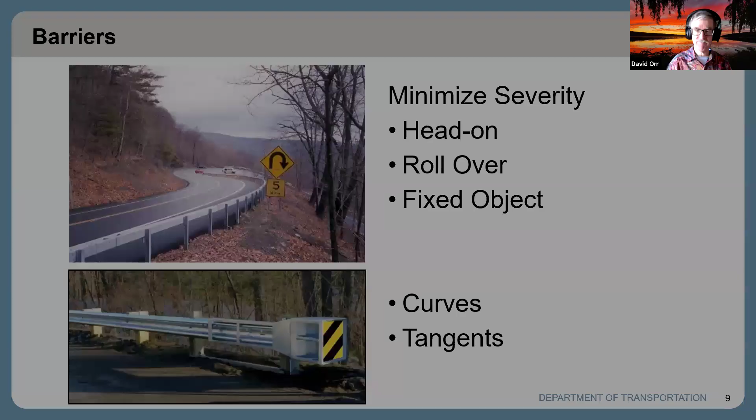So let's get you to raise your hand and ask. Do you think you need rail here? We're going to make you work a little bit. So, do you need rail? I'm hoping most of you raise your hand.

This would be a spot over in the Gunks, not too far from New Paltz. It would be really hard to make this safe as we'd like it to be without some kind of rail system. You can't really do any of the other steps that we'll talk about here in a little bit. So yeah, this is a spot where you definitely need rail.

Now I'm going to lower everybody's hands, so don't keep clicking. Let's just ask that same question. Do you need rail? What do you think? How many of you think you need rail here? Okay, not as many of you think you need rail here.

We'll talk about what you could do if you didn't have rail here. The big thing I want you to take home more than anything else: if you decide to put up rail, please put it up so that it will do the job. This particular rail has some issues which we'll talk about, so make sure you do the rail right.

Now, what we're going to talk about: we're going to start with roadside hazards. What are we trying to protect? Again, if you can't access the polls, that's fine, just put your answers in the Q&A. I can add it in, it's not the end of the world.

We're going to talk about roadside hazards—what's out there on the roadside we have to protect against by doing certain things, including rail. We're then going to talk about the treatment options themselves, and then what is the correct rail. Selecting the rail is pretty important, including intersections and transitions and things like that. And then we're going to end with a series of short case studies, putting it all together to see how you're doing, and also maybe pick up a couple of final items as we go.

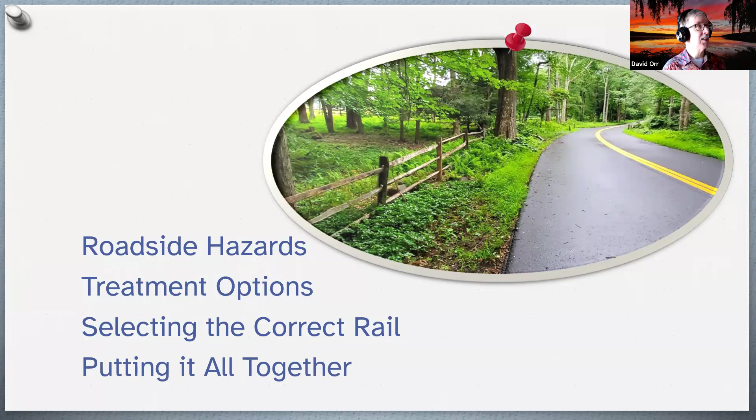Okay, so let's start with roadside hazards. So what kind of roadside hazards are we dealing with? Well, let's just ask you: type into the poll some typical roadside hazards, things you're worried about.

Trees—oh very good, trees, I like that one. Again, you can put it into the Q&A if you can't access it, and trees is up there. Rivers, ditches, curbs, utility poles, abutments, fixed objects, houses, rocks, buildings—I like that. Banks—it could be a bank as a building, or it could be a bank as the side of a road, that's a lovely thing about English. And over in the Q&A I've got piers, rocks, bollards. Again, there's lots of things we can think about putting out there, and there's a few others that I've got on my list.

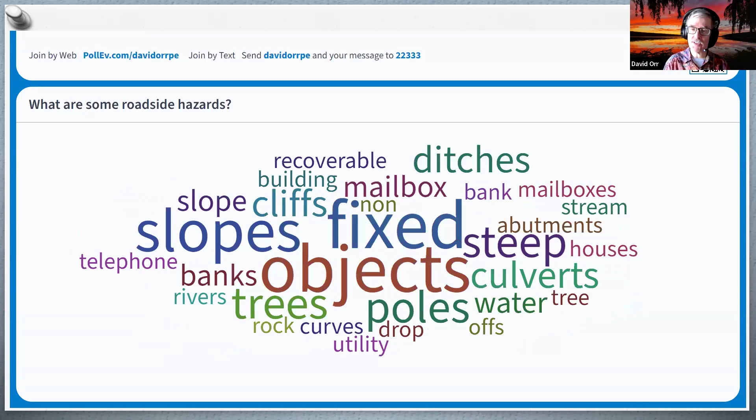Now, one thing I didn't mention—and again, this is not a rail issue, but it is something we have to think about for roadsides—rail doesn't do us any good if we've got a poor edge drop off. So just keep that in mind as we're thinking about our treatment options. Long before we worry about the rail, we need to make sure someone can actually get to the rail. So look at your edge drop offs, include that. You want to think about your cuts and your walls.

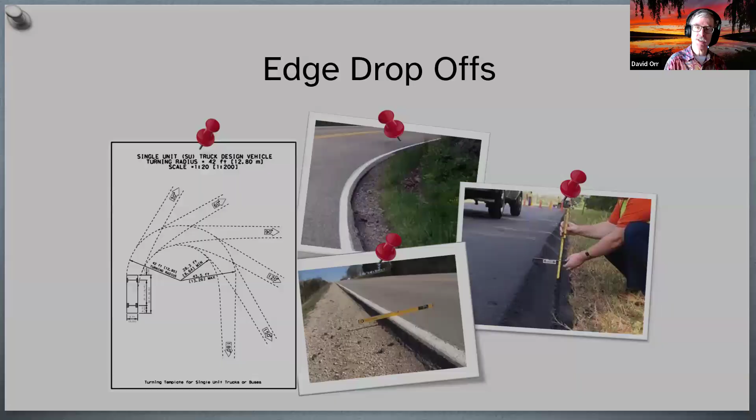A wall that's nice and smooth on the inside, or a cut section, might not be as dangerous as a fill section. Is that wall enough, or do we need to do something more? That's a balancing act, and there's no perfect answer here. We're not going to give you all the details you need, but in an hour we can at least think about the kinds of concerns that might call for rail or might not.

Now, obviously, slopes - that was on your Wordle that we created. Slopes is a major issue, especially a big fill section. Obviously if someone goes off this slope, that could be an issue. But the challenge is, if it's a really low volume road, is it worth putting up the rail? We'll talk about that a little bit. But slopes is an issue - in fact, it's probably the place we put most rail up.

Someone put in rivers and streams. Obviously, especially if someone can get behind the rail system, if they drove into a river or a stream - especially if it's deep - that could be a safety issue, or a pond. So these are things to think about.

Now, nobody put the next item on my list in the Wordle, and yet it's out there, but it would be awfully hard to put rail up to protect it - and that is mailboxes. We need to make sure mailboxes don't, in of themselves, create a safety hazard. So think about that. And again, we can do things before we put rail up to make it a little bit safer.

And the term appurtenance - a new word for you if you don't have it in your vocabulary. Appurtenances include your signs, your poles, your guide rail. These are all things we have to deal with. If they get struck, they can create a safety issue if they're not installed properly. So by themselves, they can become a fixed object that we want to be careful about.

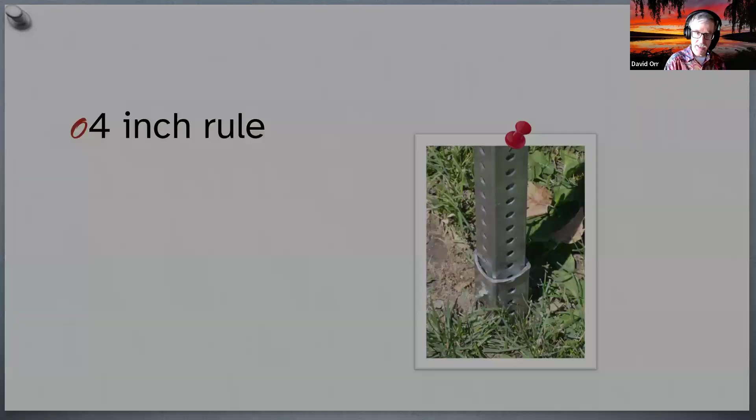Now, I said I'd talk about this a little bit. Poles - we can't do much about all utility poles, but if we have a pole in a particularly difficult location, and you can't move the pole and they really have a problem, they do make breakaway poles. We don't want a breakaway traffic light pole, because obviously if it falls, that can create other safety issues. But for utilities, they do make such poles.

If you're interested, there's a lot of information in the state's highway design manual section on Guiderail, which is chapter 10, and that's listed in the handout if you need a link to that. But the thing I want you to think about is the fact that guiderail in of itself - and some people call it guardrail, but Guiderail is what we use here in New York - guiderail in of itself is a fixed object. And if it's not done properly, it can actually make crashes worse than if there had been no rail there in the first place.

So I want to make sure we understand that before we leave after the hour together.

When it comes to fixed object crashes, the first thing listed were trees. Trees get listed first because 48% of all the fatalities that occur when you hit a fixed object happen because somebody hit a tree or a big shrub. So yes, trees are an issue. We can't get rid of all the trees, but we can think about where trees are and how we manage them. By the way, trees in urban areas can be just as deadly. Low speed still has a lot of tree fatalities. So trees are the big issue.

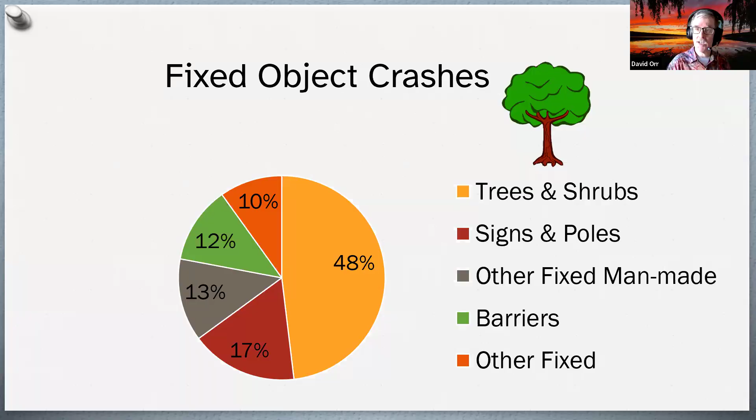In terms of the clear zone and basic recovery width, a clear zone is essentially the distance from the edge of the traveled way until the first fixed object. In the state's Chapter 10 on Guiderail in the Highway Design Manual, that's also listed as a basic recovery width. If you've got a wide roadway, like on the interstate or a major road, you want some width where if a vehicle pulls off, it would be safe for them to drive and not hit something. We know that clear zone requirement is going to be very difficult for a lot of people, so just something to keep in mind.

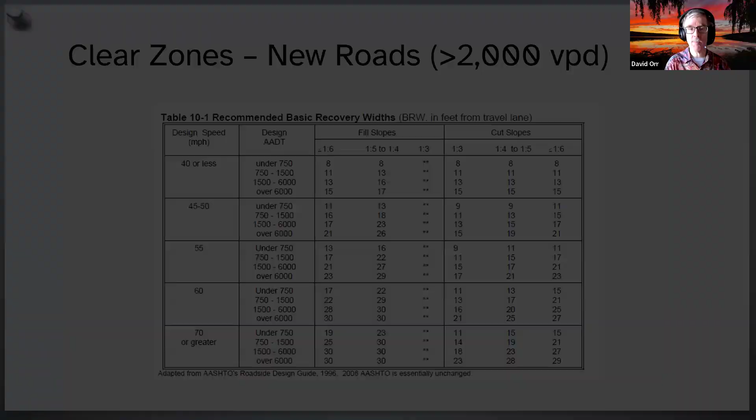The requirements in the state's Highway Design Manual range from 8 feet on a fairly flat slope all the way up to 30 feet on a high-speed roadway. I know you're all thinking the same thing right now—you're going, hey, that's too small. That's okay. If you really want to look at these distances, go look at Table 10-1 in the Highway Design Manual, which is listed in the handout.

I see a question about breakaway testing requirements. I'll talk about that here in just a minute, and we'll leave that question active so I don't forget it when we get to that particular section. Okay, thanks, Jody and Amanda.

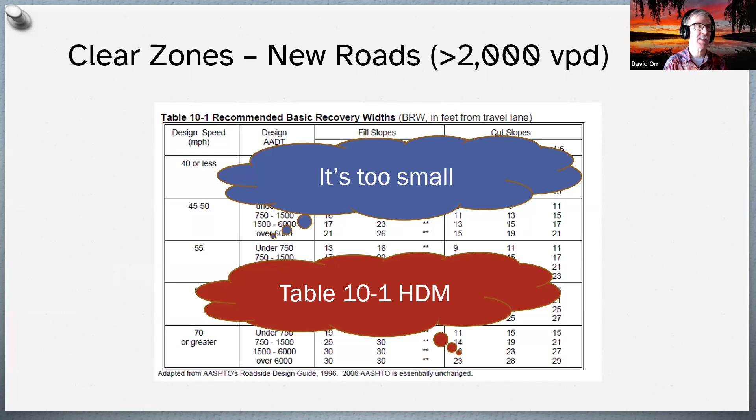So what is the clear zone on existing low volume roads? There's a standard from AASHTO called the Low Volume or Little Green Book, designed for low volume roads. If you read it carefully, essentially if you've got an existing road that's low volume—and low volume we could argue about, but it's about 2,000 vehicles at the upper limit, though 400 might be a more realistic number—if it's an existing road, you just maintain the existing clear zone width.

There's an asterisk there, though, meaning you still need to look for problematic issues. Maybe it's something that's never had a crash but could still lead to a severe issue if it did. A row of trees may or may not be a problem in itself, but we'll talk about that in a bit. The key is you need to look at your problem locations and improve anything during construction. So if you had a tree or two that was a problem, especially on the outside of a curve, that's where you'd spend your money and effort.

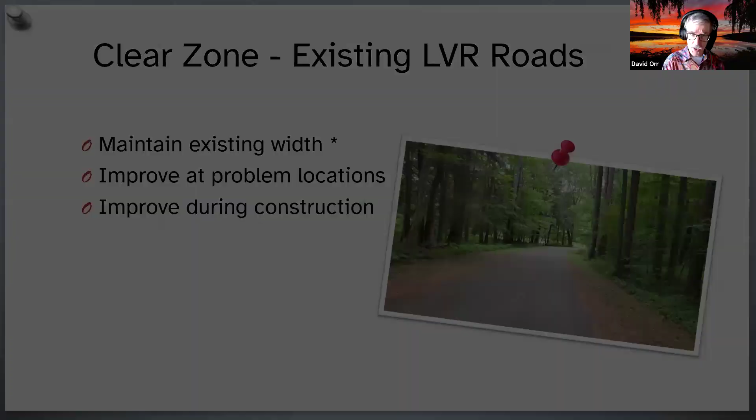Now, are there any issues here? If you've seen this picture before, I've shown it in a few other of our slide decks. It looks like it's not too bad to the left, but think about if you drove to the left and didn't see these stumps.

By far, one of the biggest things is that once you decide you're going to remove something, remove it. Make it flush. Again, that 4-inch rule is pretty important. In this case, those stumps may actually be more dangerous than a tree would be, because they're really hard to see. So someone might actually think they're going to a safe spot when they're not, okay?

So before we put up rail, we really need to think about the treatment options that we've got. What we really don't want to be seeing is fixed objects that look nice but could be deadly, okay? So the first thing we want to do is think about the order. Long before we put up rail, we're going to be doing other things. We're going to remove the problem. We're going to make it traversable, as safe as possible. We're going to relocate it completely out of the way and get it outside the clear zone we would like.

Reduce the impact severity, and some people use the term crash worthy. Some people you'll see use the term breakaway. There's some overlap in all of these things, but the idea is you're still going to hit something, but hopefully when you hit it, it's not so severe. And we can argue, by the way, about what is traversable, what is crash-worthy, what is breakaway. I just want you to keep in mind that long before we put up rail, we need to make sure things are as safe as possible. Rail, shielding, is actually one of the last things we look at.

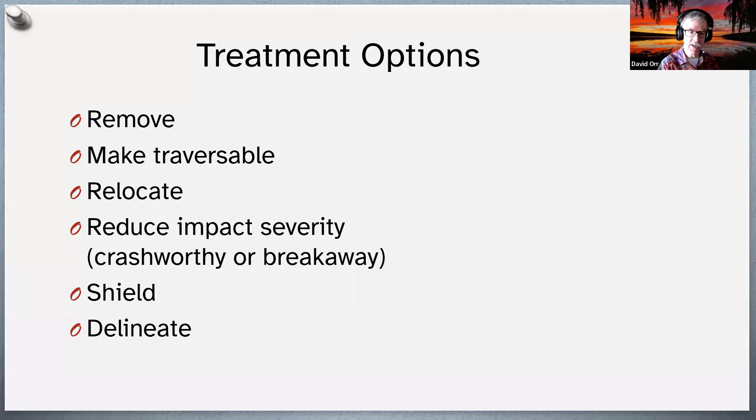Now, the standards all say for higher volume roads, especially, the last thing we want to do is delineate. I will tell you right now, personally, as a short term, you should always think about delineating things. And there's some evidence for those low volume roads, in this case at the 400 vehicles per day level, that delineation may actually be less risky than putting up rail, just because of the challenge of putting rail up, okay? So keep that in mind as we do things.

Now, what I mean by removing, well, that means get rid of the hazard completely. Now, some people will say that I've just made this traversable by filling in this ditch and putting in a series of catch basins so you can drive over it. You get a nice wide clear zone. True, but we've removed the hazard from the standpoint of the driver. If you can remove it, that's obviously our first choice, and we actually can do that in some cases. And when we end our session today, we'll talk about a couple of those.

You can make things traversable. Now, in a perfect world, traversable means going over the top, and there's still something there. Maybe that catch basin, the last one, was actually traversable. There are things out there to make ends of culvert pipes, especially those parallel to the roadway, a lot less dangerous. Doesn't mean there's not going to be property damage, but if you drive down the road, you could drive over these rebar grates or these special ends that go on the end of culvert pipes without doing anything other than property damage if they're installed properly.

The ones I like, by the way, you can grab on them in a storm event and pull them out of the way, but we can talk about that. But again, remember, whatever you put up might create damage, and that 4-inch rule still comes into play.

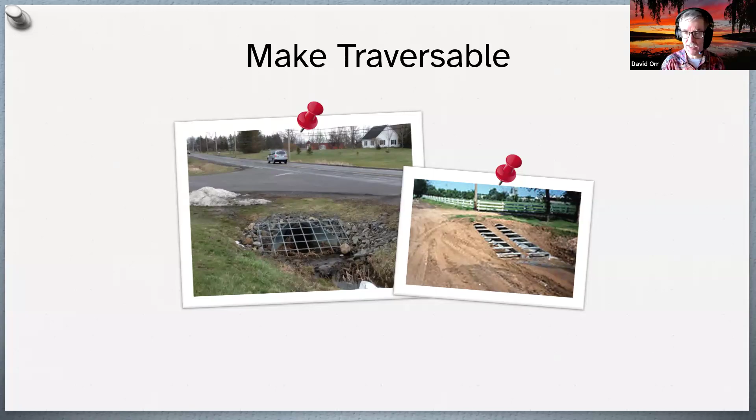In this particular case, that series of utility poles is right in the bottom of the ditch. Almost one of the worst places to be. Obviously, I think all of us would agree, we really should be having that pole... let me pick a color I think will work. Let's see, I think the white will work. We really should be having these utility poles up here, up on the top of the bank, okay? So that if a vehicle does go in the ditch, which, yeah, it's probably a little deep, but at least if they go in that ditch, they don't go down the ditch and wind up driving right into a utility pole.

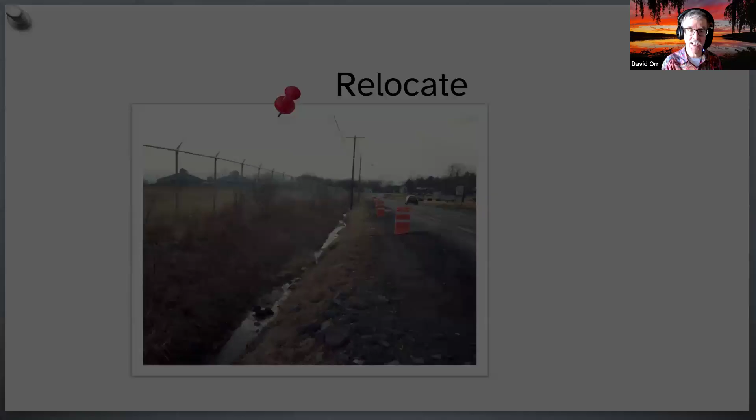Now, even if you've got a flat ditch, think about this. How many of you, raise your hand if you think that utility pole needs to be moved? Raise your hand. Please raise your hand. Everybody should raise your hand. That utility pole is in one of the worst possible locations. It really needs to be back up on the top of the back slope.

Okay. I actually ran the math on this particular one. If I was to move that utility pole right here, just off the edge of the pavement, it would actually have about the same chances of getting hit as where it is now. Because yes, it's closer, so it's more likely to be struck by an errant vehicle, but I don't have to worry so much about someone who goes all the way in the ditch and stays in the ditch. That's actually a fairly common crash type. They go parallel the road to the bottom of the ditch. So, obviously what we really want to do is put that thing out here.

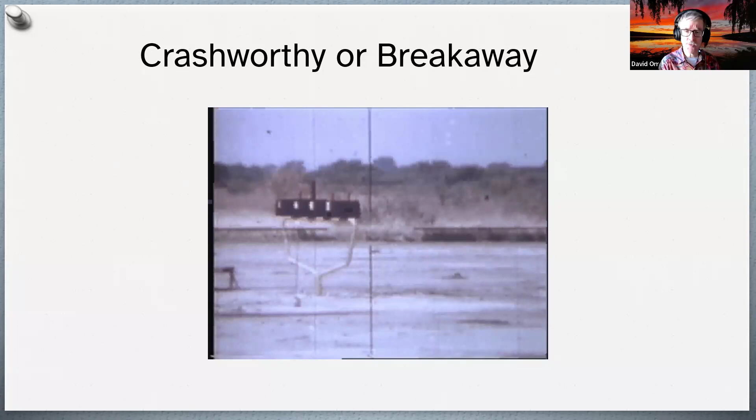And I hope, by the way, that that pole, that post, is breakaway, not too thick. Gets bigger than 4x4, you need to be thinking about drilling holes in it, things like that. So what do I mean by crash-worthy or breakaway? Well, crash-worthy or breakaway, reduce impact severity, different terms for it. Here's an example of a gang mailbox. Watch what happens. Rather than it going into the vehicle like we saw earlier, it's designed to actually snag on the hood and pull out of the way. Okay? Again, it's going to do some property damage. We know that. But it's not going to go into the vehicle. So that's what we mean by crash-worthy or breakaway.

That includes mailboxes. And yes, I see the states putting them up. I think it's a good idea if you've got a high-speed roadway. And what's high speed? Well, anything above 30 miles an hour is probably a place where you need to be thinking about, worrying about people hitting something in the mailboxes. And it's not the speed limit I worry about, it's what people are actually driving. So think about breakaway. That's your breakaway hardware for your signs. That's your breakaway possibly for utility poles. Anything that has to be in the right of way or has to be in the clear zone because of the need we have for traffic, think about making it crash-worthy or breakaway when somebody hits it.

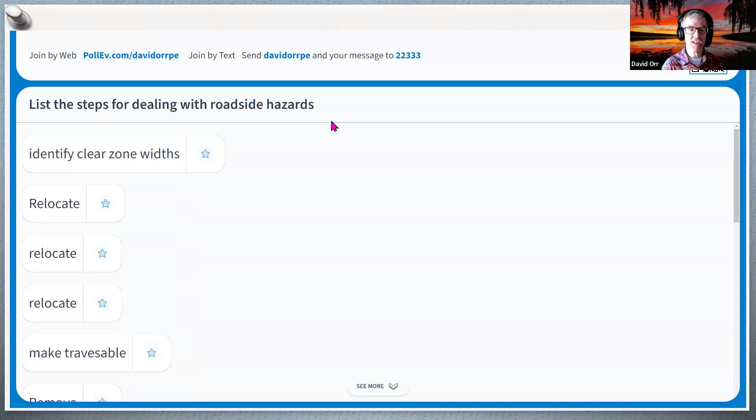Okay. So essentially, think of it this way. You want to remove the problem, make it traversable, relocate the problem, make it crash-worthy, and if you can't do any of that, then we start talking about shielding. And you always look at delineation. And on a low volume road, that may actually be the right thing to end with if you can't do anything else. Now, let's talk about choosing the correct guide rail.

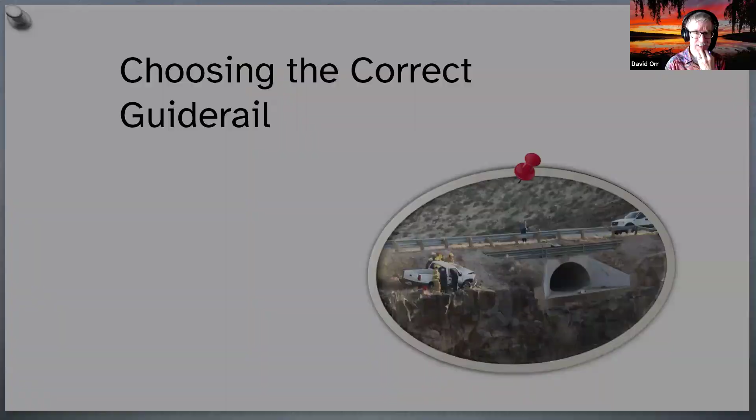Now, what is guide rail? Well, guide rail has different types that are out there. We care a lot about the deflection distance behind it, the point of need, where do you actually have to start the actual rail segment? That makes a big difference. I'll touch briefly on something called run out length. On a local road, you're not going to see a lot of that, but you might see it on the interstate or protecting a river or stream, but something to think about. And then we'll definitely want to talk about end sections because if you don't have a good end section, the rail doesn't do the job.

Now, in the Q&A, somebody asked for information about breakaway systems, okay? And what's going on with breakaway systems today. We used to do breakaway and hardware testing that includes signs and rail with something called NCHRP, the National Cooperative Highway Research Program, Report 350. But that got replaced almost a decade ago, now, in 2016, with the Manual for Assessing Safety Hardware. Okay, there is a newer version, but I just want you to realize it's been around for a while. All hardware gets tested using this system.

It accounts for the vehicle types and sizes, and then the Federal Highway Administration actually puts out letters to say, hey, these have met the particular standards, and then states will adopt those standards. So inside of the HDM, it lists the hardware that the state uses here in New York State. New York State has actually spent some money to test box beam, which we'll talk about, and cable rail using the new MASH system so that the current standards here in New York meet those requirements, okay? But again, those need to be approved materials. And then in terms of guidance, you'll look for that material information in MASH, okay?

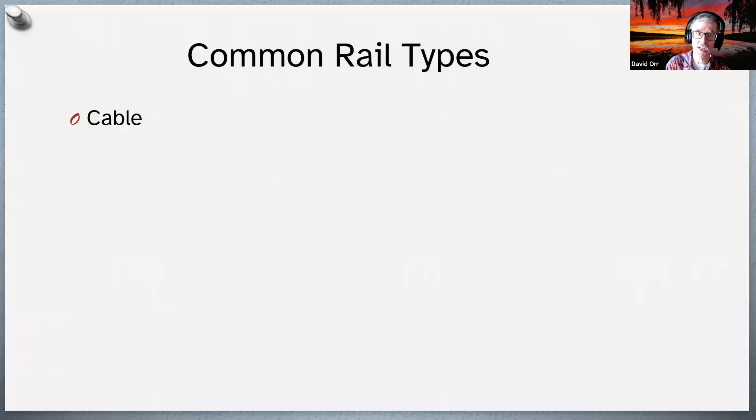So what common types do we have to deal with? Well, obviously, we've got cable rail, we've got weak post W-beam, box beam, heavy post, blocked out W-beam, concrete half sections are the most common. There's tri-beam, there's lots of connectors, there's special things you can do with all of these. But again, we're just going to touch on these and talk about how we choose one over the other.

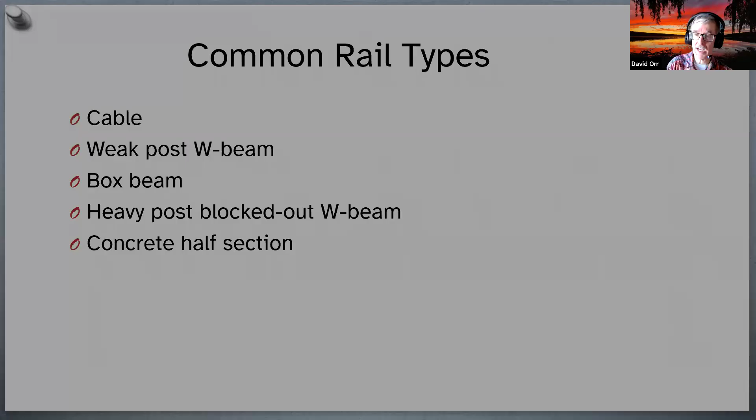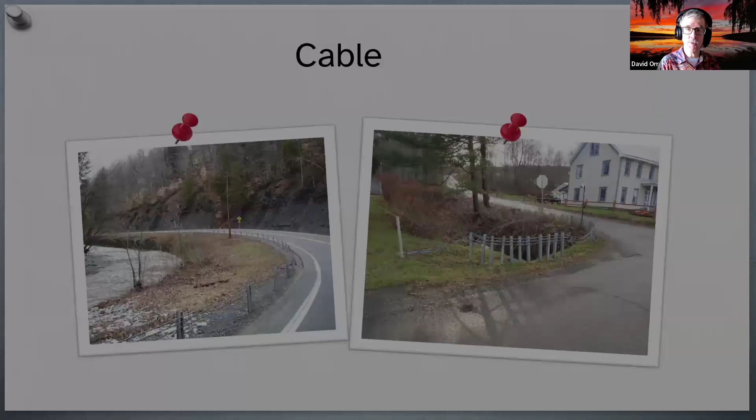So a lot of agencies, especially if they don't have a large staff, might prefer to look at using a weak post W beam. It's essentially a fairly small post with just a W rail in front of it. It's very popular, can be made with the Corten brown, all that fun stuff if you want. But again, it's got to have the transition, it's got to be able to build up that length, but weak post is very common.

Box beam, the state likes box beam here in New York. DOT had some of that tested using MASH. You'll see box beam all over, and it's used on a lot of bridge rail, especially multi-box beam for the bridge, and then it goes down to a single box as the approach system comes into place.

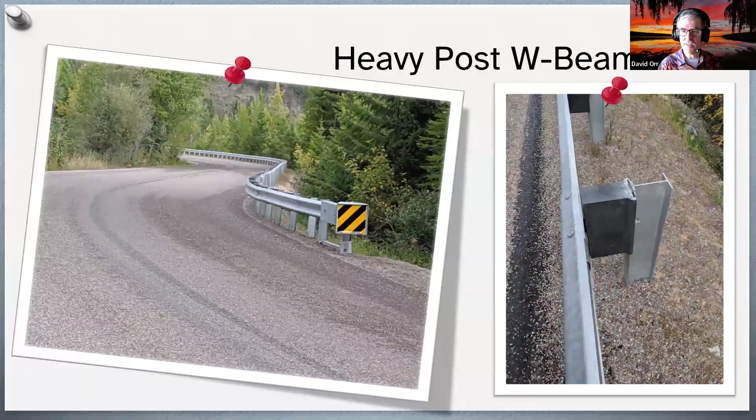Concrete half sections, well, you don't want zero deflection. Concrete half section can do the job, but how do you transition to zero from no deflection? Transitions in sections on concrete can be a challenge. So what type of rail should you use?

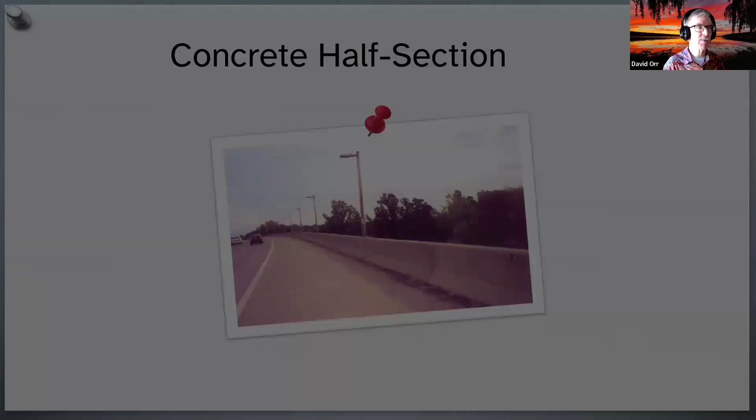Here's the thing: I'm a big believer in using the lightest possible rail that will do the job. The lightest rail that will do the job. Because there's no point in putting up something heavier—it costs more, and it can actually start to create some deflection problems. So something to be thinking about.

Now, somebody asked: does the NCHRP safer barrier used on highways anywhere in the country—is it too costly? I'm not aware of any location that's got it, but that doesn't mean it's not there. It's a big country. We're talking about general types and local guiderail policies that have been developed. I don't know of any local ones that have been developed. That's not a bad idea to have a policy dealing with residents, because residents want rail. And railing, again, is a fixed object in of itself, but people like to jump to it immediately. So I don't know of any particular ones, but if you've got one, send it our way—we'd love to post it on our website.

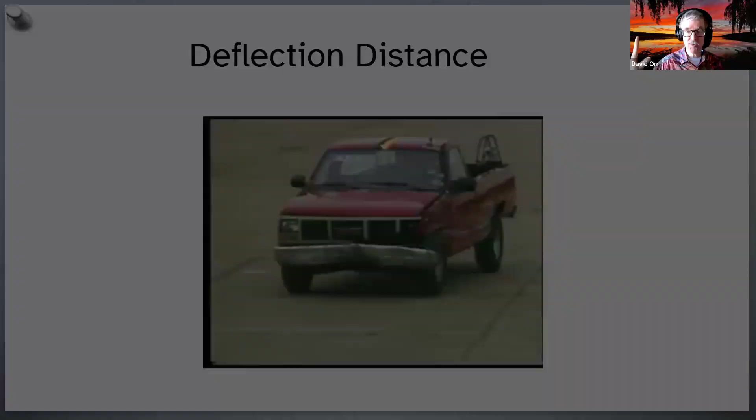This is in your handout, but notice: cable, I can only get down to about 7 feet, even with really tight post spacing on a high-speed roadway. There are some deflection reductions at lower speeds, but let's just assume high speed, 7 feet. W rail, I can only get down to 5 feet. Light rail, box beam, maybe 4. If I need 2 feet or less, I've got to go with the heavy post W rail with the block out. Yes, there's a way to get it down to 0 with some special extra hardware, but for general W rail, we're talking 2 feet. And if I want 0, I've either got to do something really special, or I'm going to have to go with the concrete half section.

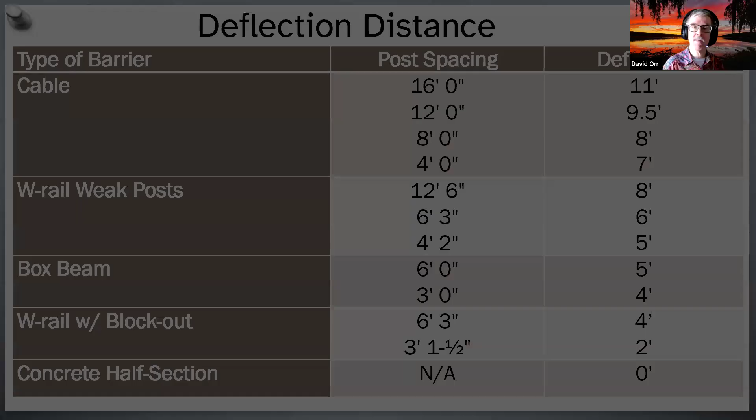So let me ask—looking at the table, I'll start the poll, okay? And then I'm going to ask you: what's the minimum deflection distance for weak rail, W rail weak post? I'll be nice to you, I'll show you the chart—just look on the chart. What's the smallest number for weak rail, W rail weak post?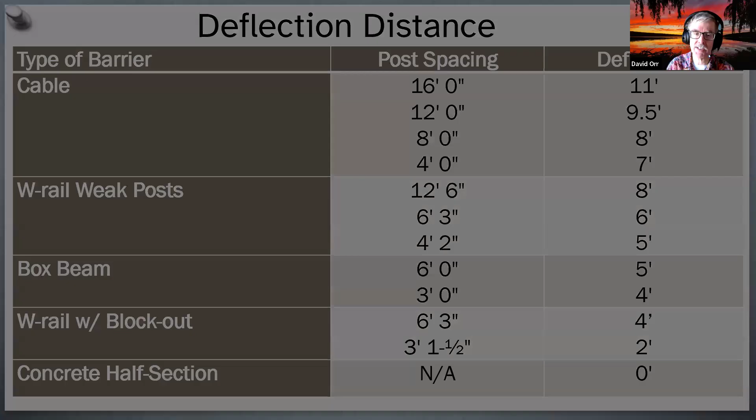It's 5 feet, very good. Yeah, it's 5 feet. There was a time when they would actually get these down to 3 feet, but it didn't really change the deflection distance. So yeah, it's 5 feet. You can decrease the post spacing all you want, but it's not going to really help.

In this particular case, the reason I like this photograph is because shortly after I took it, the tree was removed. And then shortly after that, a vehicle hit that rail. If the tree had not been removed, the rail would have actually directed the vehicle into the tree.

Now, someone did notice in the Q&A that you want to make sure the rails are lapped in the proper direction—you don't want them going upstream; lapped properly, overlapped, going downstream. But also make sure the bolts are proper. Replace and put in new bolts if they're ever struck. Don't reuse the bolts. Check the hole sizes and things like that.

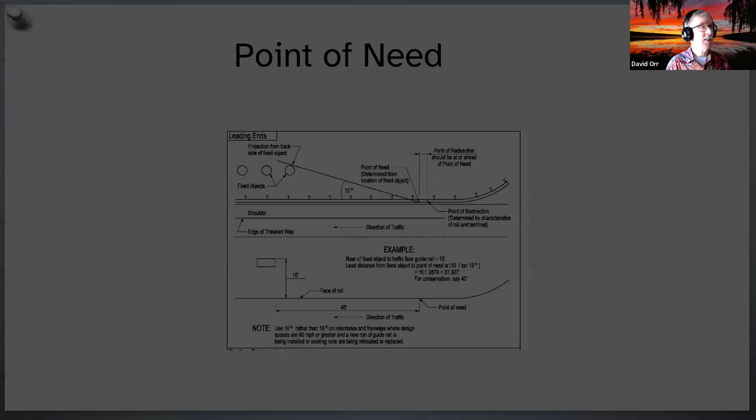Now, the other thing we've got to worry about is something called the point of need. I know the text is too small, but it's in the handout, and we just want you to understand this concept. The idea is you need to start the rail to actually protect the object—the actual point where the rail does its job is protecting the object.

So now let's just imagine I've got this rail system. I know I need to extend it because I don't like that end—they never like those. So how far back do I need to go if I want to protect this tree right here? Now, yeah, there's a whole bunch of trees, but let's just assume I want to do that.

To do that, you can calculate it out. The distance you'd need to start the rail is r times 1 over the tangent of 15, because that assumes the vehicle's coming in at an angle of about 15 degrees. You can do the math: 1 over tan 15 is just under 4, 3.73 if you care, but use 4. It's conservative, and it's an easy way to remember it. So if this is off the roadway 8 feet, I'd need to come down 32 feet.

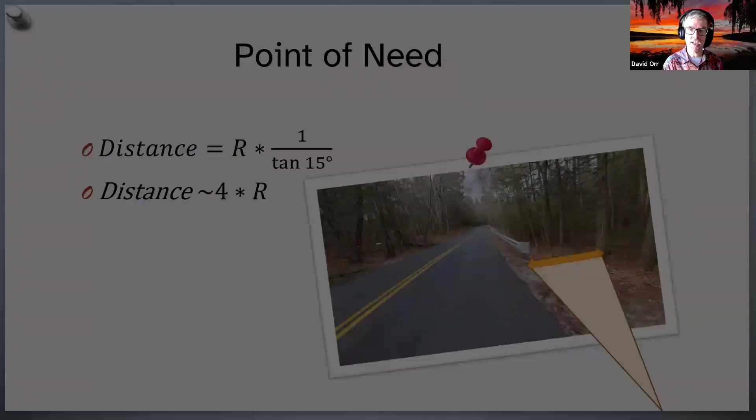Okay, let's do one more. Let's look at the rail type. That rail, again, we know is not going to do the job. Okay, the one tree's probably got to be removed, this one.

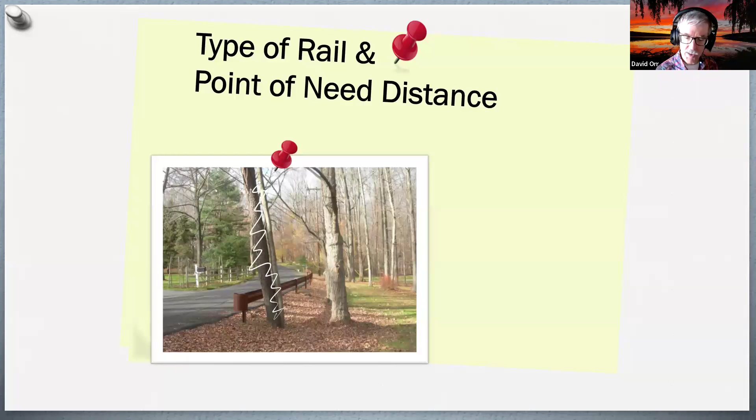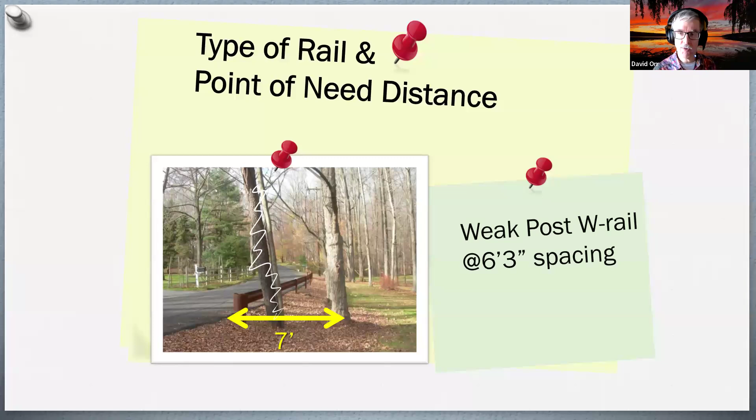But let's say we want to leave that one tree, and it's 7 feet, the deflection distance that we need. How far back does that need to be? Well, again, you can do the calculations. You just do W rail, assume it's a tight spacing, and your point of need then is 4 times that distance, so 4 times 7 is 28. If you do it exactly, it's 26.2, but use 28 feet. So in other words, to get this rail to protect that tree, I really need to bring it down here 28 feet and then put an end section on it for it to really do the job properly.

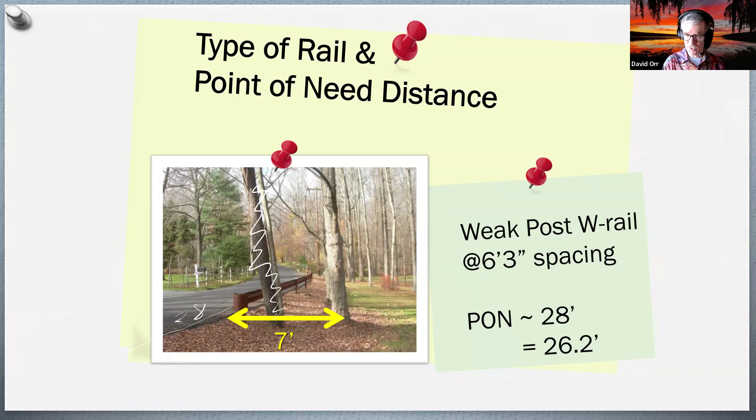So keep that in mind, where the rail starts. And that's one of the reasons that a lot of short rail systems just don't do that much.

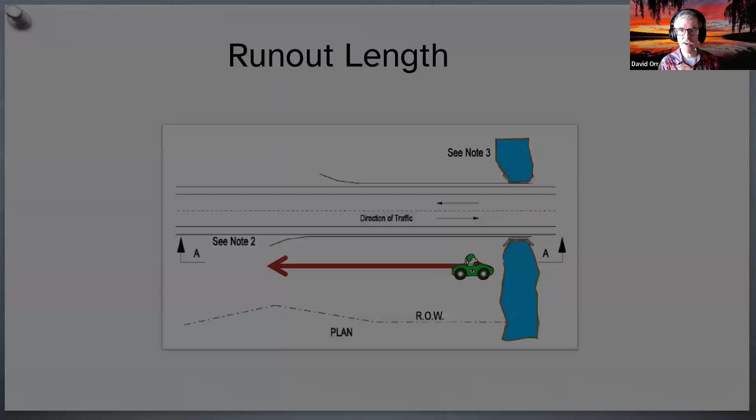Now I just want to briefly touch on something called run-out length. This is really what you're trying to protect—someone who could get in behind the rail system and drive along, and you don't want them running into a stream or over a steep bank or something like that. Again, mostly seen on the interstate; you're not going to really do it that often on something like this. More likely, you're going to be thinking about that deflection distance and that point of need.

But imagine, we just know the rail's not long enough. Because how long does those run-out lengths need to be? Well, they can get pretty long—at 55 miles an hour, we're talking 360 feet. So it'd be a long distance if someone can get in behind the rail. So it has to have a good clear zone, a flat section.

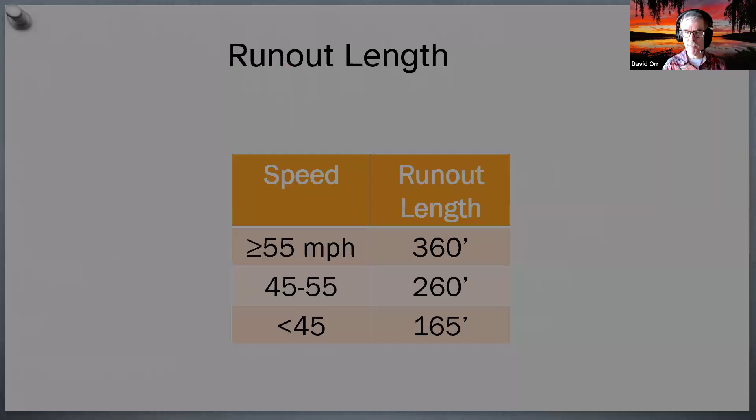Again, I just wanted to bring that up. The run-out length is something to think about. Most local roads are not going to be able to put it in, but you might want to think about it on the interstate or in a section where you've got a large flat area, okay? And really, you're trying to protect somebody from getting into water or going over a bank or something that could be dangerous. Now, with a W rail, your run-out length here would be 165 feet for a low-speed roadway—still a pretty long distance.

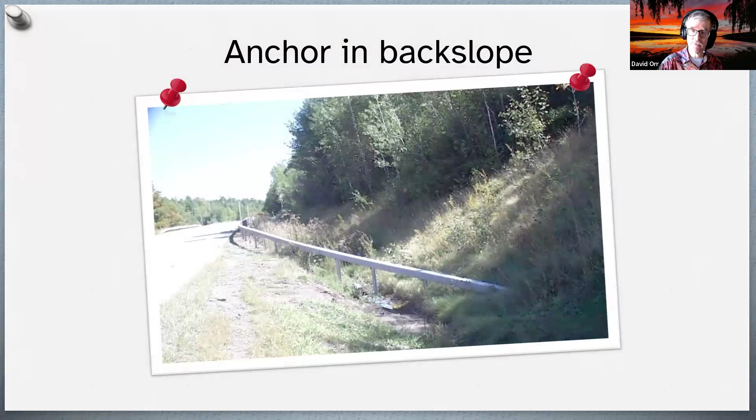You could anchor in a back slope. Okay, so now someone who hit that rail would have a back slope to protect them. At least sweep it outside the clear zone if at all possible—that's nice. You could do a turn down in, though, again, turn down ins—low speed, downstream, yeah, would work, but just be aware that they have their challenges.

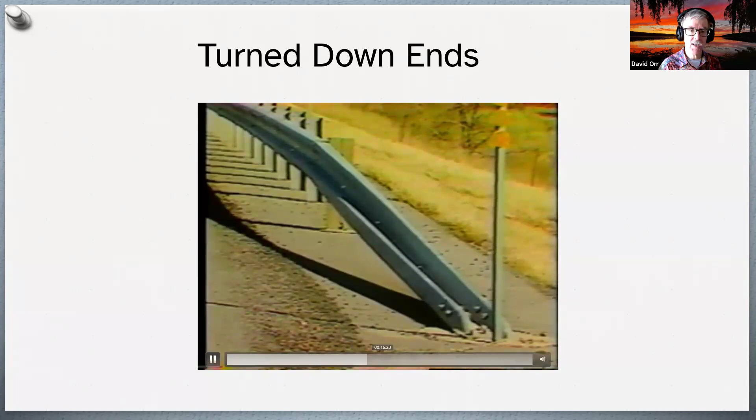Watch what happens when someone hits one of those turn down ends. That's the one we don't like anymore. So those turn down ends that just go down quick, yeah, they can lead to all kinds of problems.

What you really want to be thinking about is using some kind of crash-worthy terminal. Again, I'm not going to argue for any one of these over another. Make sure you understand there's two types: tangent ones and flared ones.

They absorb energy in one form or another, or they're designed to break away if someone hits them beyond a certain point. A lot of these systems are designed so if you hit them out in this zone, they're actually supposed to fail, or in this case, shear out. But if you hit them on the end, they just peel away.

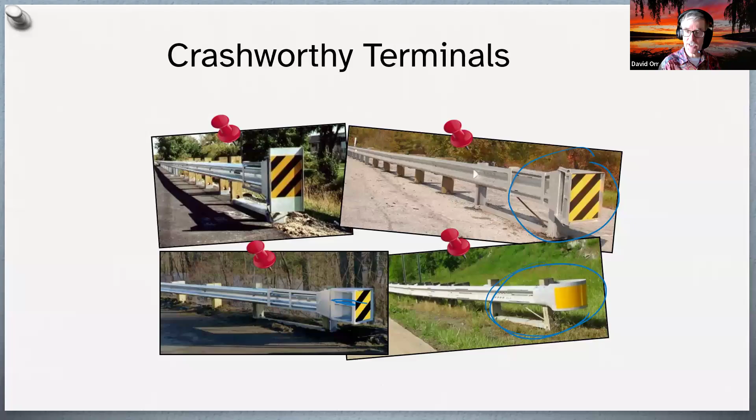It's pretty cool. They essentially work so that if you hit anywhere beyond that anchor section, they have full strength. We'll watch this and see how the video shows it - just beyond, it gets full tension, so you've got full tension past the third post. It's pretty cool if they're installed correctly.

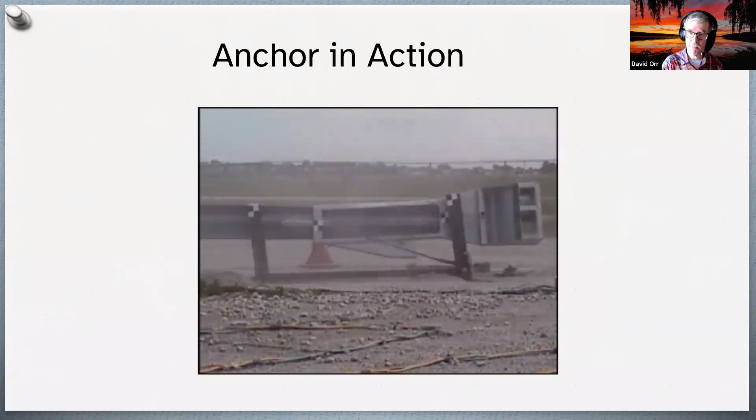But if they're not, it's not going to do you much good. If you don't properly attach these end sections, they don't work. So you've got to make sure they're anchored properly, whatever you choose. And you really do want good end sections - there's a lot of good choices out there, and we recommend them to give you the strength you need.

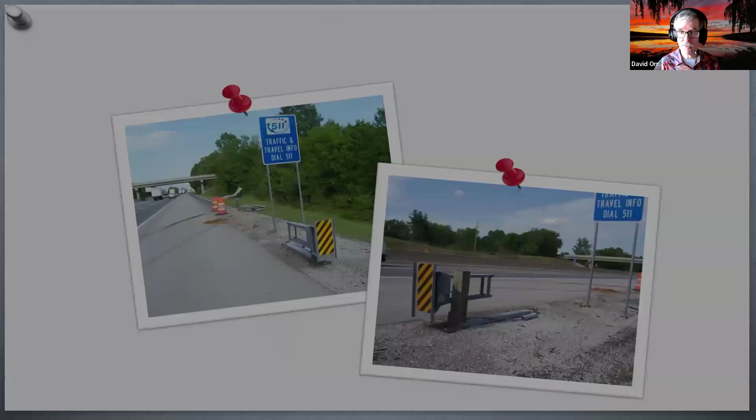And of course, if you're approaching a bridge, they're absolutely vital to transition from a light system to a heavier system - in most cases for bridges, zero deflection. So as you're doing it, think about that transition.

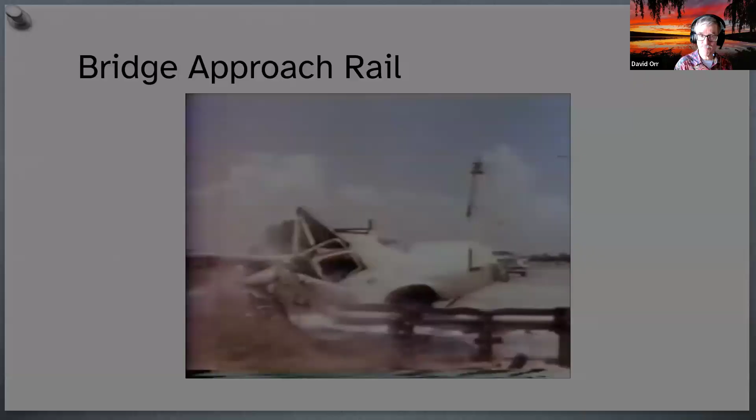In this case, good example of what not to do, because the rail actually helped direct the vehicle right into the concrete. That would have been a fatality if it had not been a test case. In fact, here's an example of rail prior to getting hit that led to a fatality, because it's not a good rail system, and all it really did was help direct the vehicle right into the end of a zero deflection rail system on the side of the bridge.

And don't just look at the rail system. Here's one that Jeff Scott, our technical assistance engineer, took. It's a great picture - the rail doesn't look too bad if we look at the roadway. But when you get out, you can actually see that it's lost all that support down here.

It's lost all the support. And so therefore, it's not really going to do that much good for a vehicle, because you're not going to get that soil support that we talked about.

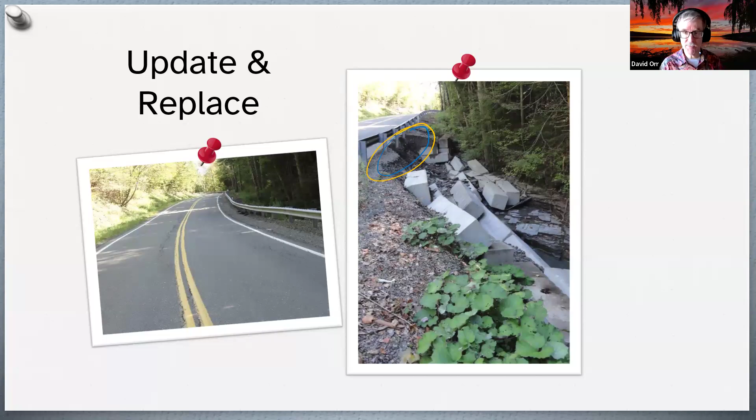Okay, so now let's put this all together. I want you to think - we're going to look at a series of pictures that I've collected. By the way, if you've got a good, bad example, please send it my way. What I really prefer are ones where you fixed the problems, got the before and the after, just so you know.

Let's put this all together. I'm going to show you a series of photographs, problems. I know you can't do everything, that's okay. But I want you to think about: is this a site where we should be thinking about removing any hazards, make them traversable, relocate the hazard, make it crash-worthy, shield it - i.e. put up rail - delineate it in some way, or just do nothing? And then in the Q&A, you can also throw in are there other things to think about when you look at this particular site. Okay, you ready? Here we go. So, first one.